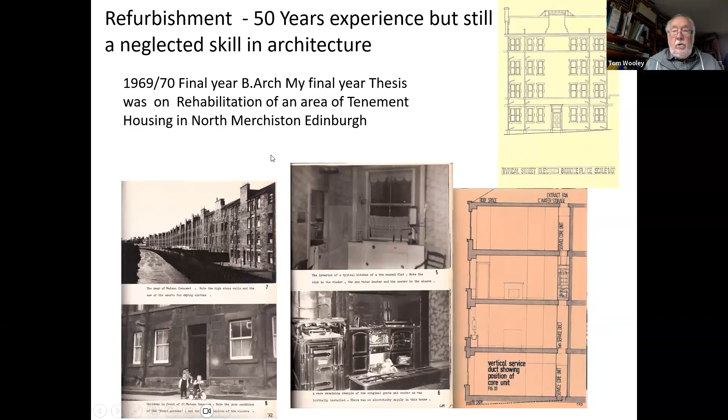In terms of my own experience, I am getting a bit old these days, but still very energetic, particularly in this area of work. I did start out as a student - my final year thesis was about refurbishment. So I've always felt that retrofit was a very important, but perhaps underrepresented, area of architectural education and architecture practice. Next.

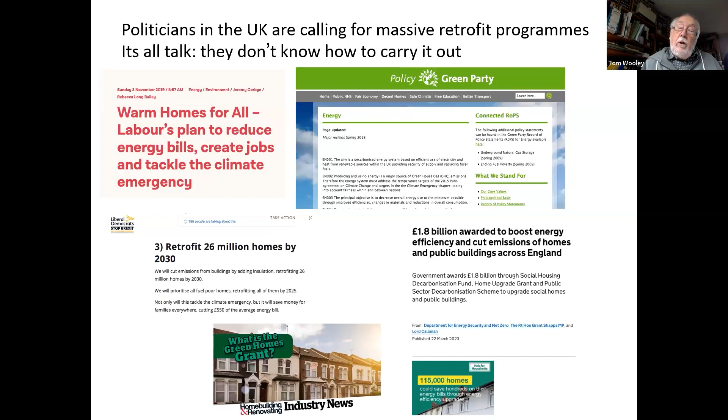We hear all these calls for retrofit programs. In a way, you wouldn't be on this call if you weren't aware of all of this. It's really just to remind people that there are all sorts of absurd proposals for retrofitting lots and lots of houses, but often made by people who really have no idea how to do that. Next slide.

The other big problem we've had is really a number of years, at least a decade or more now, of what Kate de Selincourt has described as the retrofit disaster. I've certainly given a number of talks about this retrofit disaster problem, in that the wrong materials and methods are often being used to renovate buildings, causing what is rather euphemistically called unintended consequences.

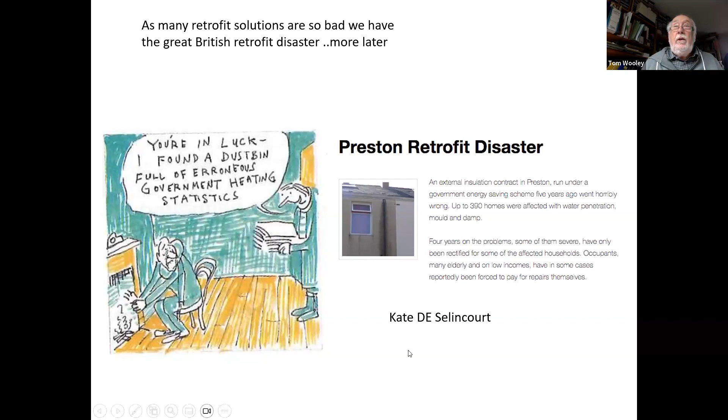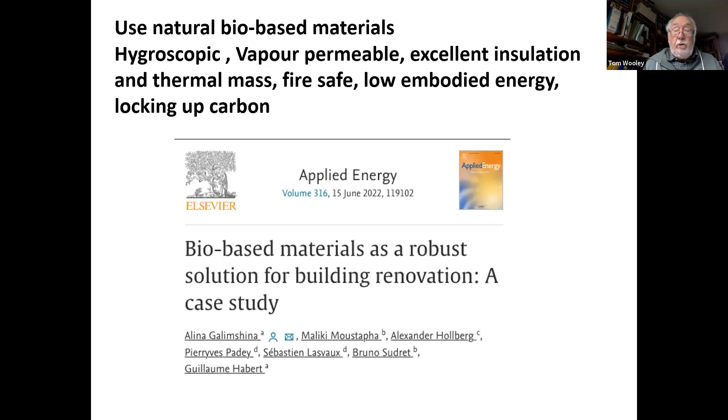Next slide, please. So I'm going to be promoting the potential for using natural bio-based materials, because these are hygroscopic. That means they are able to deal with moisture much better than conventional synthetic materials. They're vapor permeable, which is often described as being breathable, which is not a very scientific term. They provide excellent insulation, but they also often have thermal mass. They're mostly fire safe. They have very low embodied energy, which is an issue still struggling to get onto the agenda, and they can lock up carbon as well. There are many studies coming out now setting out the scientific case for bio-based materials - here's just one example of a recent paper. Next, please.

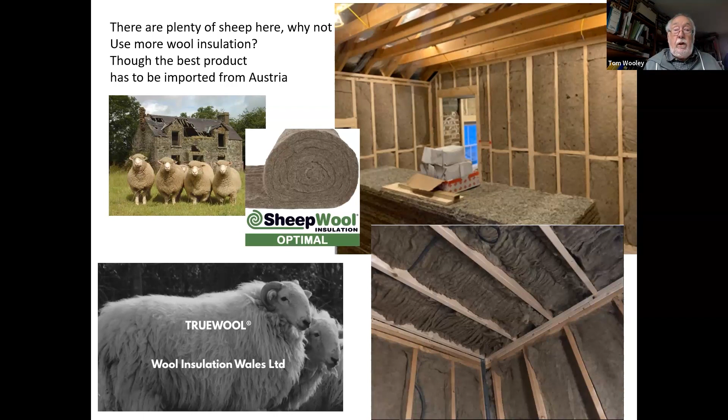This morning I've been on a seminar organised by Innovate UK about sheep wool insulation, so I thought I should mention that. Sheep wool insulation is a natural bio-based material made from effectively a waste product, because the farmers get next to nothing for the fleeces. There was a very interesting session this morning about the potential for manufacturing sheep wool insulation in the UK. That's worth looking at.

There are a growing number of companies producing or selling bio-based materials, especially hemp-based products. Some of the people at this morning's session about sheep wool are a company called Sisaltech in Scotland. There's a big factory being set up by Indie Nature producing hemp insulation. There's a company called Hempspan. There's a range of products from a very innovative company called Adaptavate. I'm also going to mention a company in Shropshire called Lime Green.

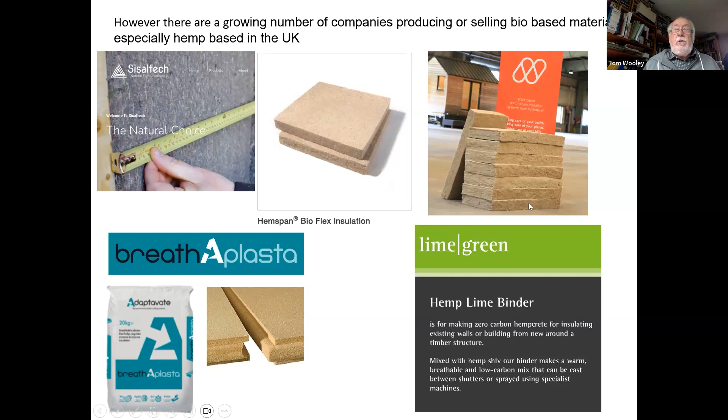One of the arguments often used against bio-based materials instead of conventional materials is that there's no supply chain, or they're difficult to get hold of, or they're expensive. Those are really largely myths now. The products are available, and a lot of these companies could scale up production if there was greater demand.

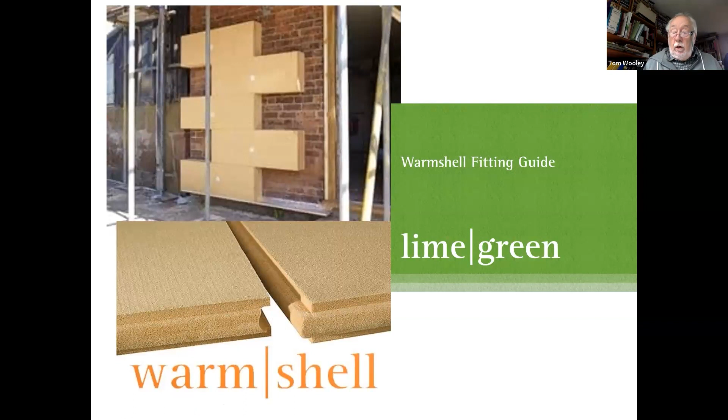For instance, Lime Green in Shropshire have developed a renovation system called Warmshell, using wood fibre insulation. This is very popular among many architects and other organisations.

What used to be called the Carbon Co-op, now People Powered Retrofit in Manchester, have been renovating many houses for their members using wood fibre insulation, and we've used this ourselves very successfully. It isn't necessarily always appropriate for projects, but it's a good option.

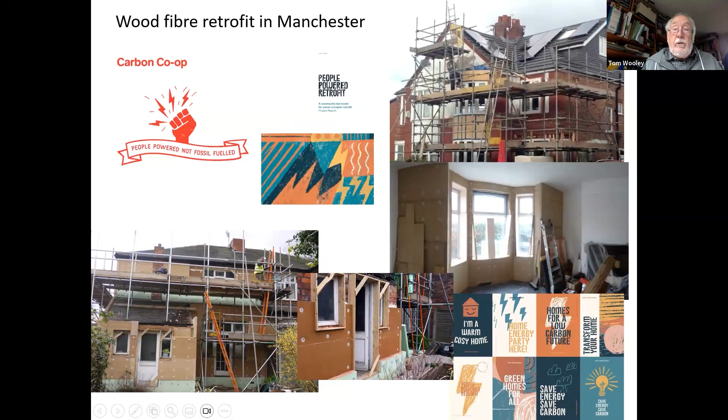Another product being promoted quite heavily now in the UK is cork lime. Fantastic product. The companies that produce this are very high standard. They come from Portugal and Italy mainly, but it's very expensive, unfortunately. Maybe if they sold more of it, the price might come down a bit. The other problem, of course, is we don't grow cork trees in the UK, so it has to be imported.

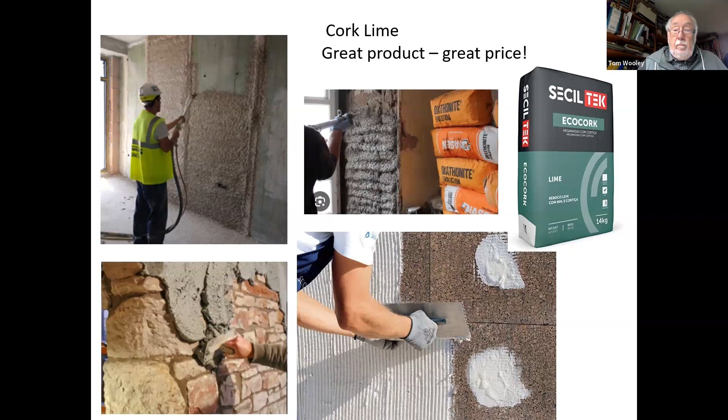Hemp lime is, in my view, the best material to use, and is something we've used extensively now. I've got some pictures here of the wonderful Graham Durant from a company called Hemp Lime Spray. Here you can see him spraying a wall with hempcrete using a laser to get a straight line, straightish line anyway. At the bottom right-hand corner is a recent project I went to see that he did in Tipperary, where the hemp lime has been sprayed on the outside of the old stone walls of this building.

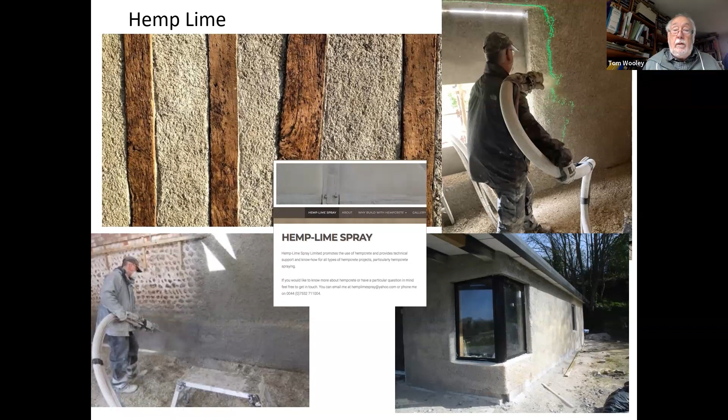Hemp lime's been used for the last 20, maybe even 30 years as a renovation material. Here's a project in Herefordshire and one near Heathrow Airport, where hemp lime is being used internally, or in the case of the bottom right one, on the outside of a building. It can be used in both situations.

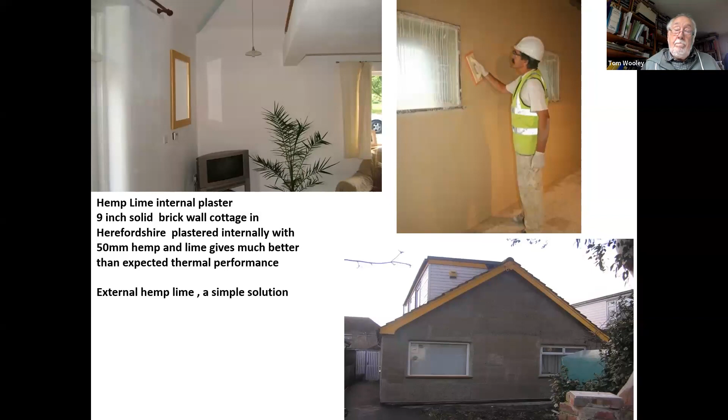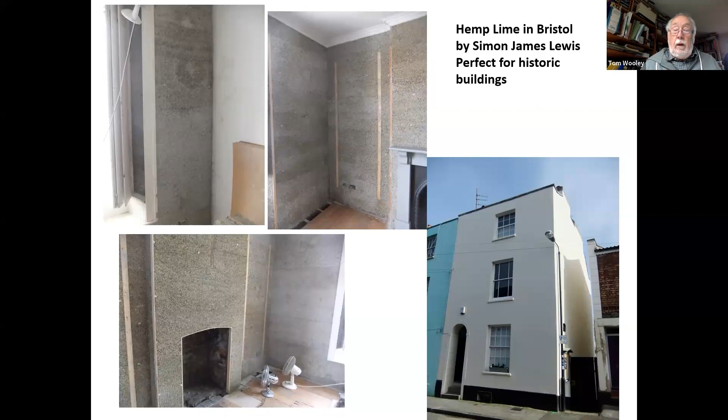There's been an exponent of using hemp lime to renovate historic listed buildings in Bristol. Simon James Lewis has been working on this for many years and has done it very successfully. We find that many conservation officers are very open to the use of hemp lime, particularly where it's replacing the old wattle and daub, or lath and plaster that's failed. It's a tremendous material to use with these sort of buildings.

Here's an example of someone in South Wales who's been using hemp lime to renovate relatively modest, not listed or historic buildings, just ordinary houses. Here you can see the hempcrete being put in place using temporary shuttering. If you do it carefully, you almost don't even need to plaster it, because you can actually paint directly onto the hempcrete once it's dried out, which if done properly, dries out very quickly in a couple of weeks.

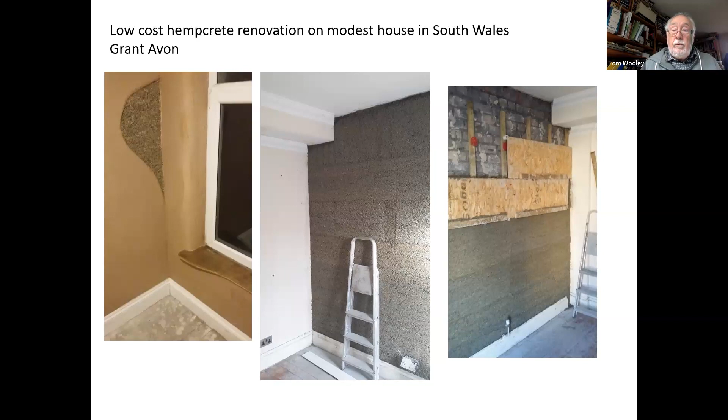The building I'm most proud of that I've been involved in is the Rediscovery Centre in Dublin. This is a conversion renovation of an old steel frame boiler house, and all the walls here have been renovated with hempcrete. About 90 cubic meters of hempcrete have gone into this building. We actually used some wood fibre and recycled sheep wool insulation in this building as well, and it was a great project to do because Dublin City Council fully supported it. Even though the materials were innovative, they were very happy with what we've done. You can go and visit the building because it's open as a visitor centre and the centre for the circular economy in Ireland.

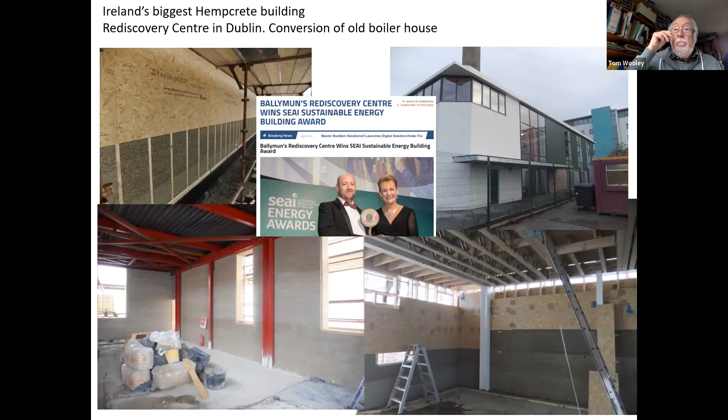So the hemp and lime materials to do hemp lime or hempcrete are readily available. We get most of our hemp from Yorkshire. There's a couple of companies producing hemp shiv there. The main one we work with is a company called Harrison Spinks. You can see some of the people there sitting on some bales of hemp.

They mainly make mattresses using natural wool and hemp, so they have plenty of shiv left over, and I can put you in touch with them if you want to buy some hemp. Then there's Lime Green, a company in Shropshire, a very sophisticated, fantastic company producing a range of lime products. They've also developed a lime binder, which we've used very successfully in projects. There are other suppliers available, but I like to use UK produced materials rather than importing them from Europe.

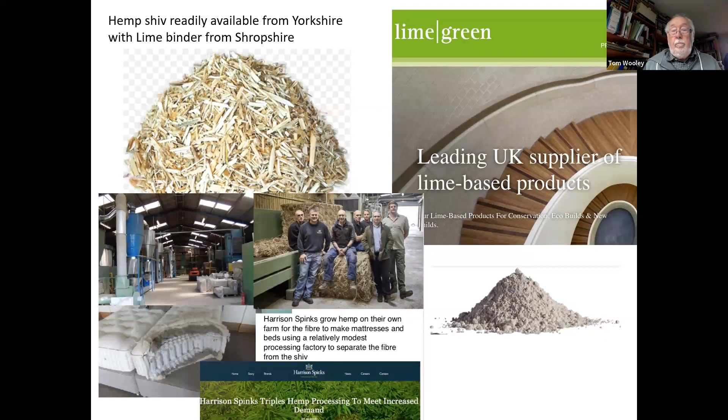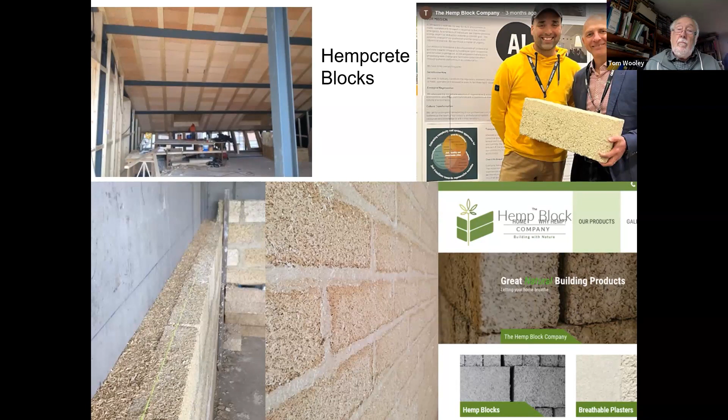You can also use hempcrete, hemp lime in block form. Blocks can be very useful in certain kinds of retrofit, particularly where you've got straight walls. There's a company called the Hemp Block Company based in Buckinghamshire. The picture on the top right is not one of their projects - it's actually somebody's very innovative use of hemp blocks in a roof of a building in Portugal. Hempcrete blocks is another way of using hemp lime instead of spraying it or casting it.

Also, in terms of finishing, we've recently been using a product called Limecote, which comes from Haverhill, Suffolk - a company whose product is very easy to apply and can be used externally and internally. So there's a wide range of materials readily available if you want to use this kind of material.

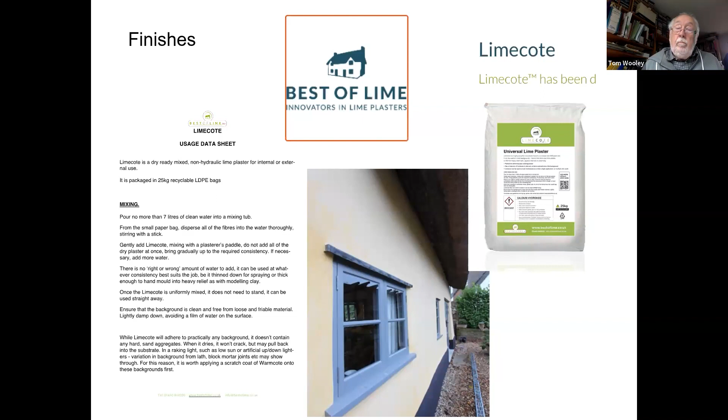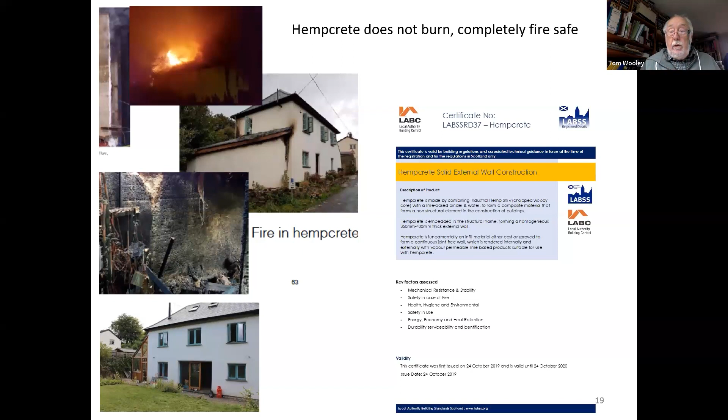Also, we have obtained certification for hempcrete. There are various bodies that certify the materials.

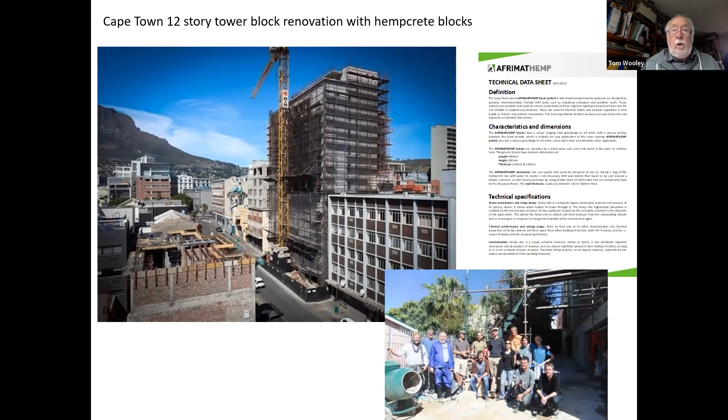So I just want to explain a bit more carefully the important reasons for this. What I've come across over the last years is that many of the conventional systems of retrofitting buildings, particularly using polymer cement renders, polystyrene insulation, cavity wall insulation, and internal wall insulation, lead to serious problems of dampness.

Kate de Selincourt's drawn attention to the project in Preston at Fishwick, but there are many, many more examples. In fact, I've done a whole series of radio interviews recently all over the UK and Scotland, where people have been complaining about problems with damp and mold as a result of bad retrofit, which doesn't allow the buildings to breathe.

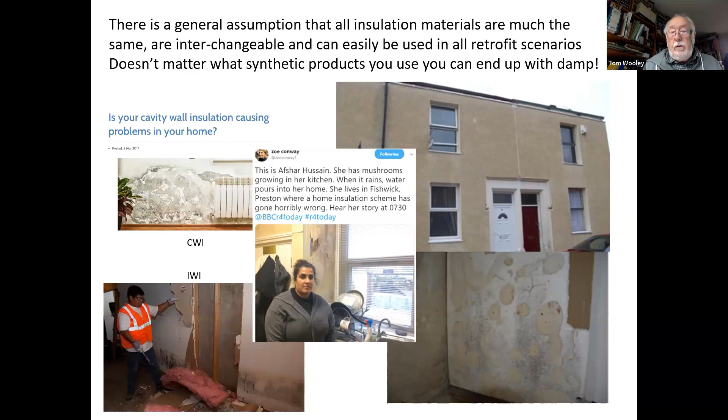There have been some estimates that perhaps 1.5 million homes have been blighted by damp after what they call cowboy builders, but actually it's not just cowboy builders. Some of this work has been done by very conventional, perfectly good builders, but they're using the wrong materials.

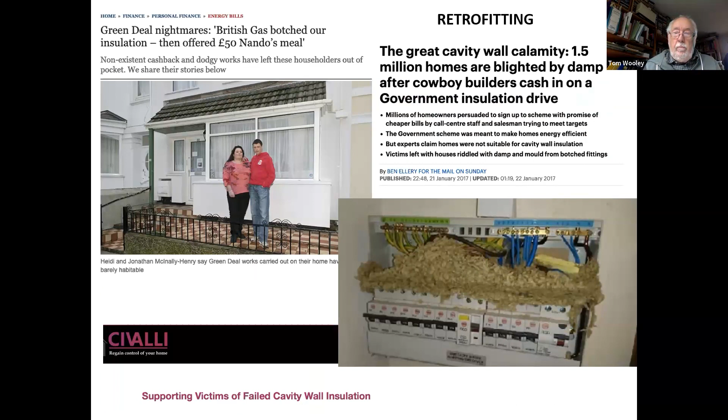For instance, a study that I was involved in - I was on the steering committee - done in Northern Ireland by the Northern Ireland Housing Executive, of about 1,000 houses that have been insulated with cavity wall insulation, found that 63% of the houses were defective, and that's not unusual in my experience. In fact, in many parts of the UK, South Wales for instance, they're now extracting a lot of the insulation that had been installed because of dampness problems.

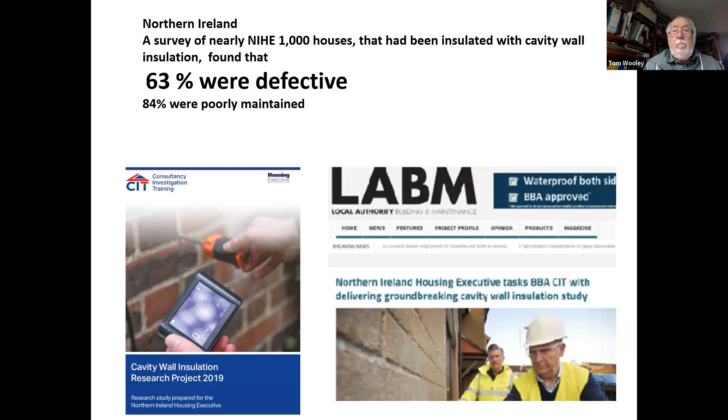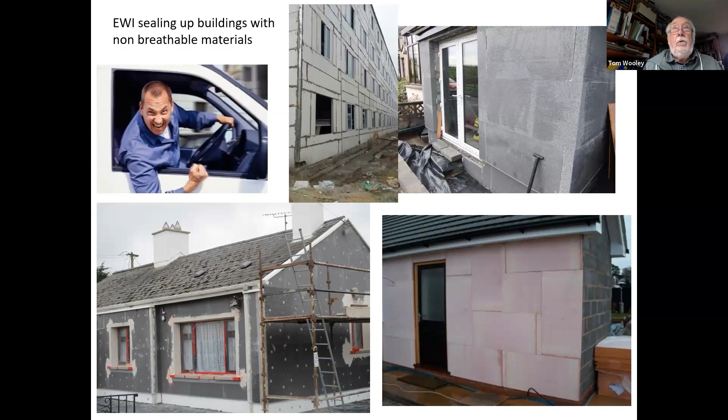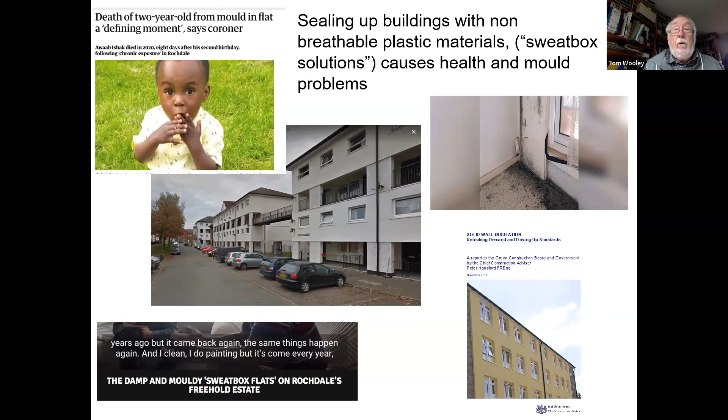And of course, this came to shocking attention when little Awaab in Rochdale died, and the coroner quite clearly came to the conclusion that this was a result of mold that caused his asthma. When I went to visit Ilminster House, where Awaab had lived, I was shocked to find that it had this render system on the outside, which had presumably stopped the building from breathing. They were still carrying out investigations into that.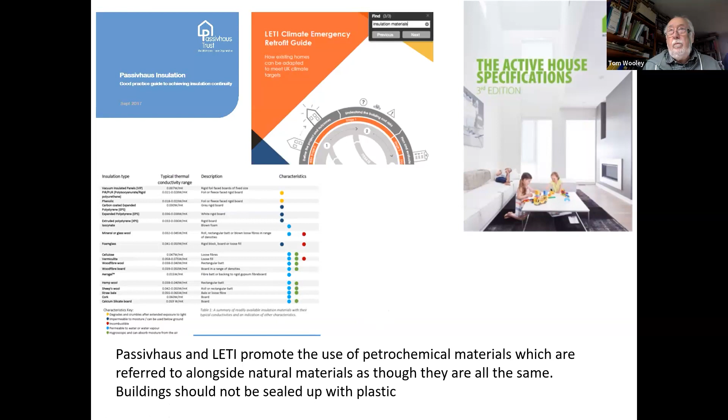One of my worries is that many of the people who promote various insulation, thermal improvement, and retrofit schemes tend to refer to insulation just as insulation. So here, for instance, the LETI guide lists insulation, which quite rightly includes natural insulation materials, but it also includes synthetic insulation materials, as though they're all the same. I think that's really worrying. We have to be moving away from petrochemical, non-breathable insulation solutions to buildings, and I'm shocked that there are organizations still promoting this. Even Active House, which I think is a better way of looking at these issues, is not strong enough on materials in my view, even though I'm very supportive of Active House.

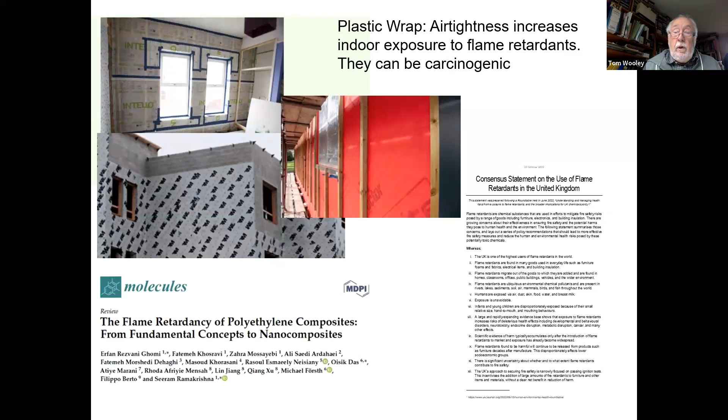One of the biggest worries, I think, is wrapping buildings in plastic, and this is often done in retrofit. I've been doing some research recently into the use of flame retardants in the polyethylene airtightness membranes that are used, and I'm part of a group of scientists that has recently published a paper about the dangers of flame retardants. I don't have time to go into this in detail just now, but it's really important to draw attention to this.

Sealing up buildings can be harmful to health. A very important project, called the HEMAC project in Scotland, looked at the health effects of modern airtight construction and has published a really useful designer's guide on this. We have to be watching out for the dangers of airtightness.

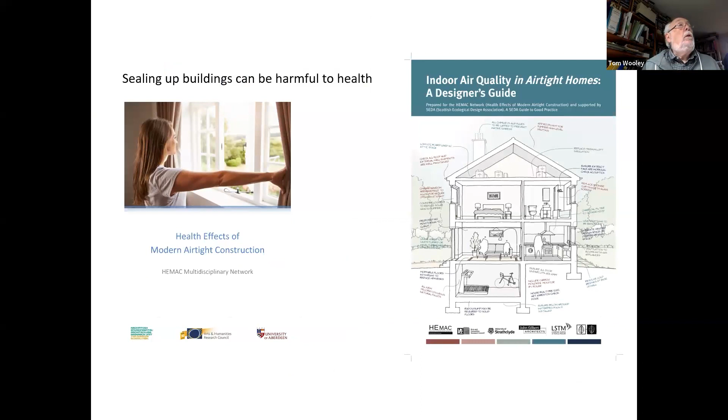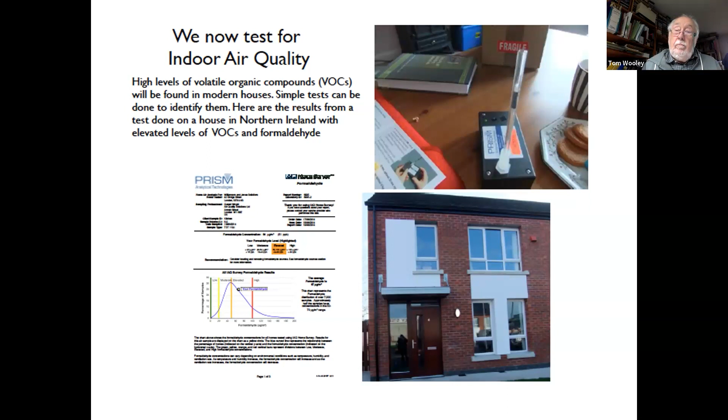So, in my view, the way to avoid these problems, to avoid mold and damp and bad indoor air quality, is to use healthy, vapor permeable, natural hygroscopic materials. To me, that's a really important solution for retrofitting buildings in the future.